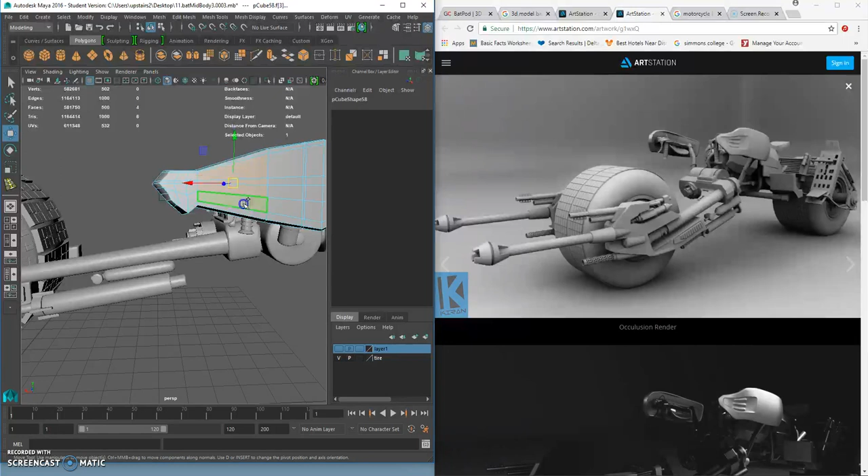Okay, in the last video I didn't have any narration, but I just made the handle. We could add a little bit of detail like this thing. Let's go ahead and do that. Actually, I don't think that's totally necessary. We'll do it, but it'll probably look fine even without it, I think.

So that's just kind of getting our area we need. Oops, can't bring this in too much. Only about to there. Alright.

And then what we'll do is we'll just go to edge, face rather. We'll grab, let's see here, I'm going to grab these three and see what it looks like.

Alright, I'm just going to fix that up a little bit.

Alright, let's see what it looks like. Kind of cool, honestly, I think you could give or take that. It doesn't really affect the geometry a whole lot.

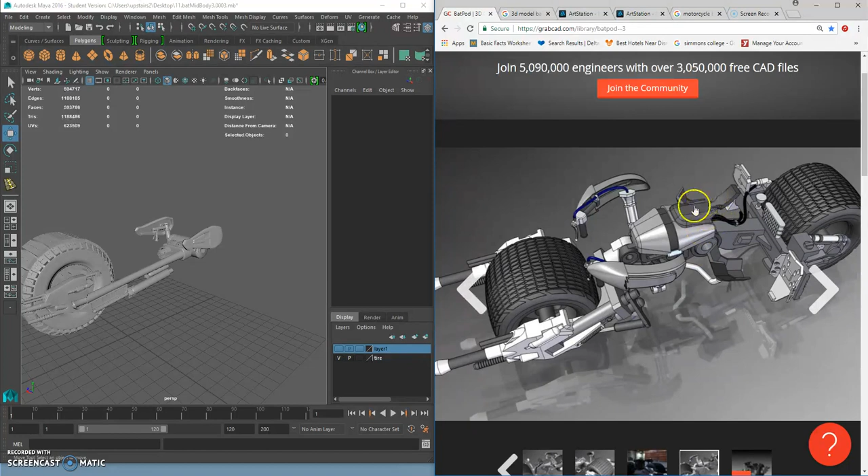Now we have to make the mid body. So it's this thing, it's kind of like that shape. The rider's going to be sitting here, their butt's going to be here, and their legs are going to be here. And they're going to be kind of gripping this thing. So they're going to be sitting like that.

So let's go ahead and create that thing, create that general shape. And let's go ahead and kick the subdivisions up to 3 each way. Or 2, let's do 3. I think 3 will be good.

Alright, so that's pretty good. Put it right in the middle here.

You could do this, let's make it a little bit wider. Alright, good. Alright, so let's go ahead and start shaping this thing up. Kind of come in here, taper in the back.

Alright, control delete, I'm going to get rid of that, I don't want that edge there. Okay, I'm going to grab these edges here. Let's bring those back, bring those forward.

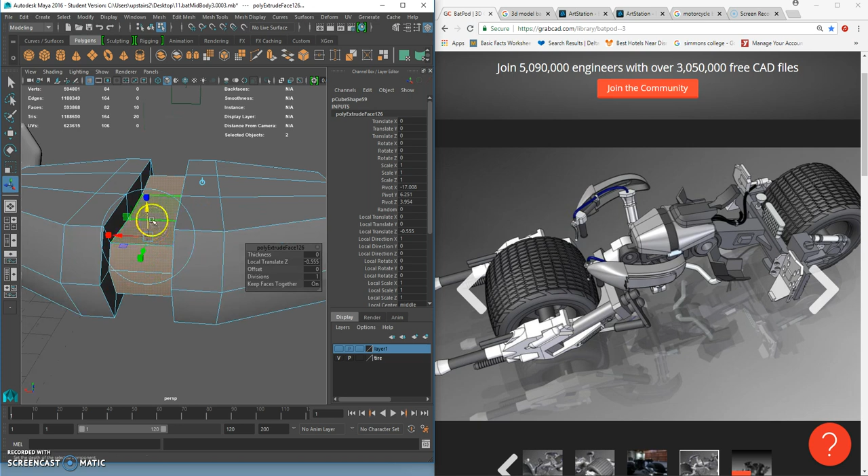Alright, I like the way that looks. And let's go ahead and hold that edge, hold that edge, let's go ahead and hold some edges now. Our usual process, set 3, and see what that looks like.

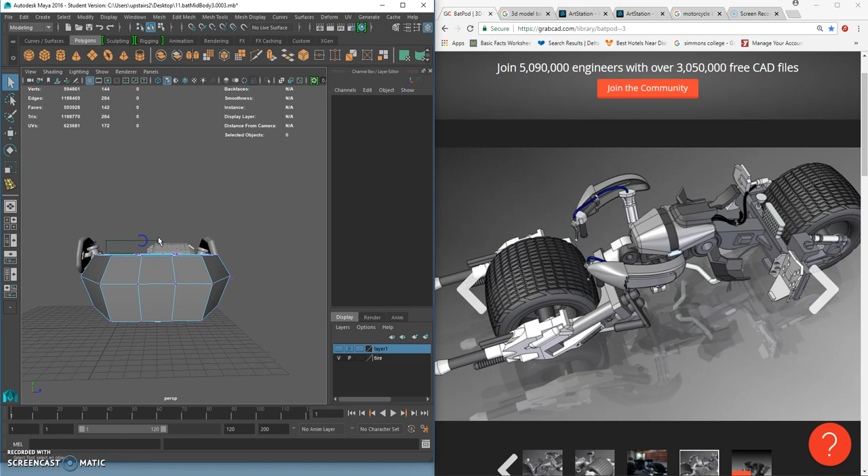Okay, it's not round enough. So what we're going to do is we're going to go to front vertex. And let's see, can we get a good view here?

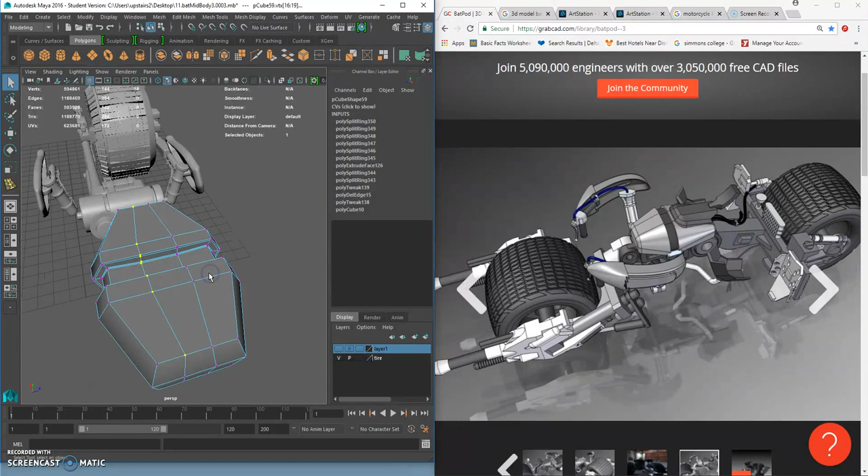Not really. Okay, so we're just going to have to select these, and we're going to deselect these. Alright, we don't want to get any of these. Just click, click, click. Alright.

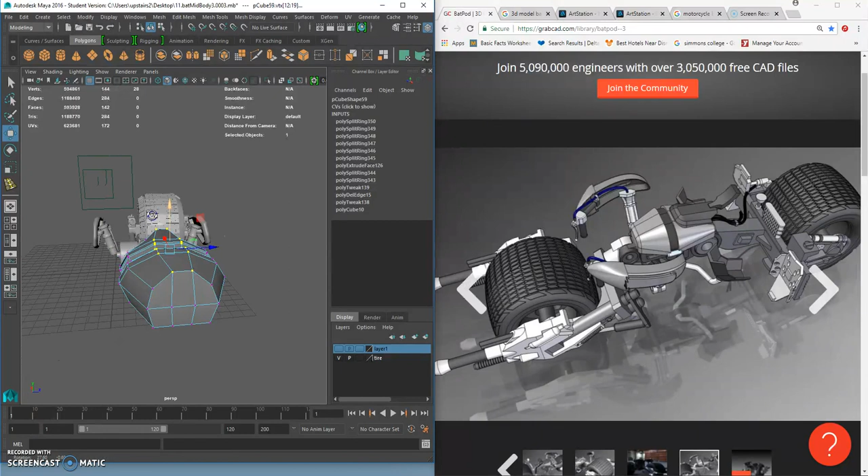Kind of an annoying selection to make. Alright, let's hit 3. That's good. Okay, now what I want to do is I'm going to widen these out a little.

I'm going to insert some edge loops here. And what this is going to do is actually harden that edge up. So watch what I'm talking about here. So when I do this, watch what it'll do. It'll put in these lines.

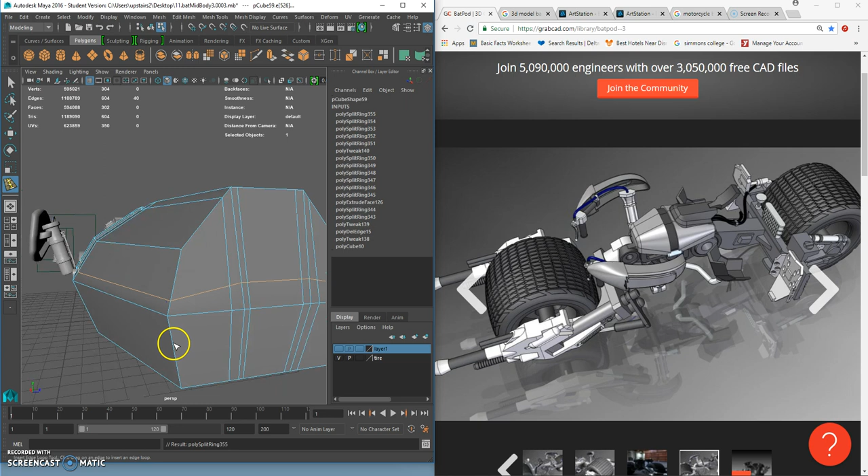And that looks really cool. And we're going to do it on the side too. You don't have to do this, it's just like a style thing, I just like the way the style looks. Yeah, it looks really cool, that's really nice. Okay, let's go ahead and put our blend on.

Alright, so now we'll go ahead and make the seat.

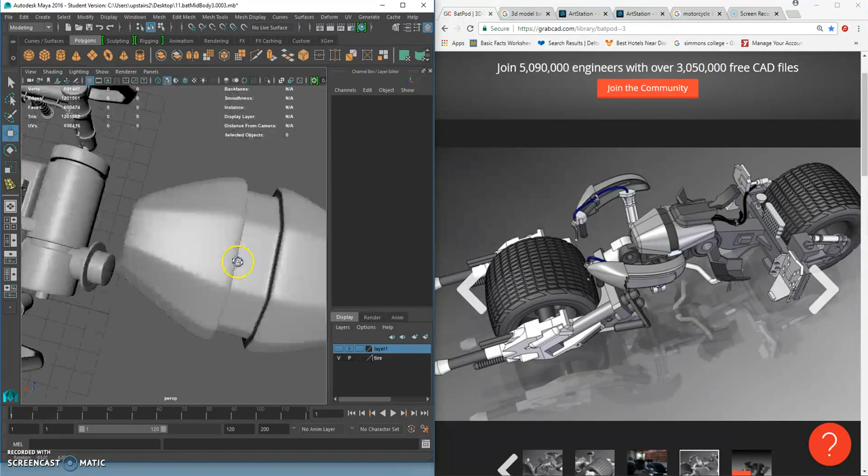We need to attach this somehow, so it's going to look like it's attached. Let's go to face here, grab this face, hit Control E, W, and attach it.

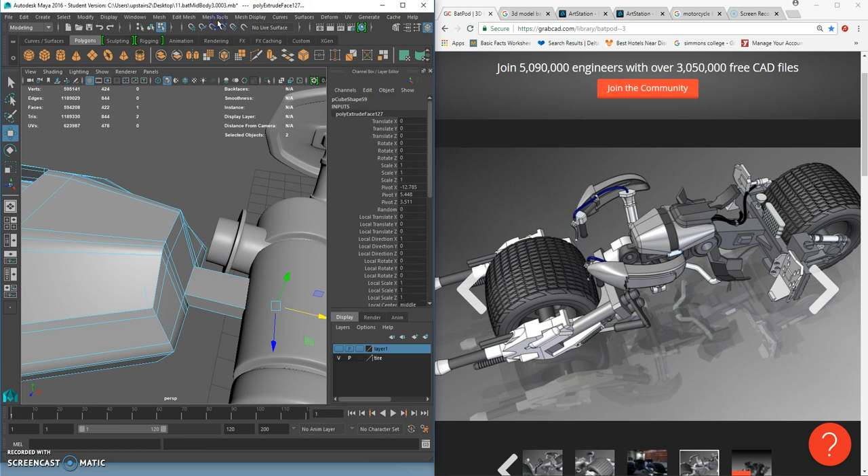I can't see that, so I'm just guessing where it ends. It kind of snaps at the end. All right, that looks better.

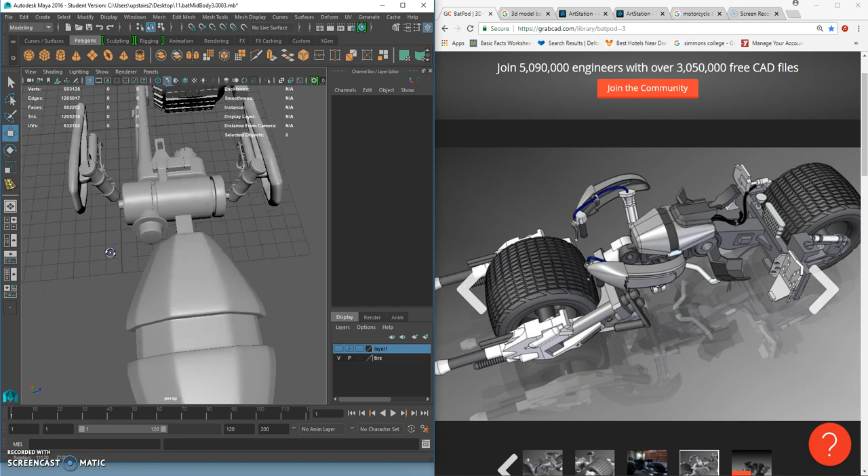Right about there, so now it looks like it's attached. It's not attached that securely, so maybe what you want to do is get another one of these.

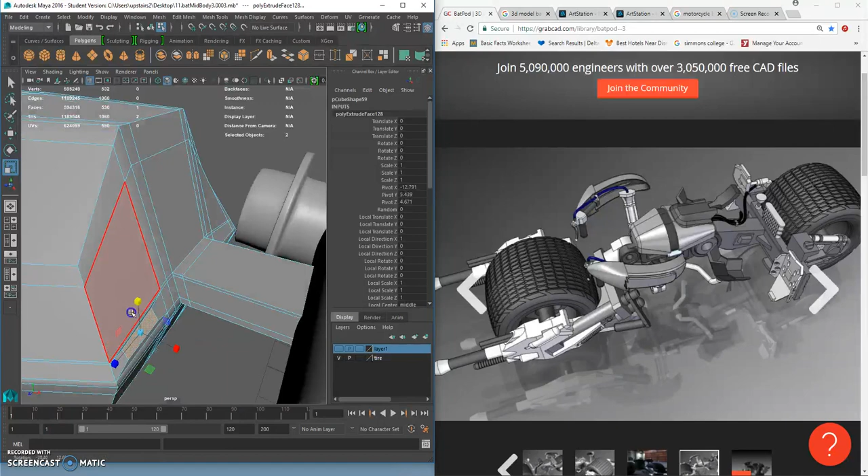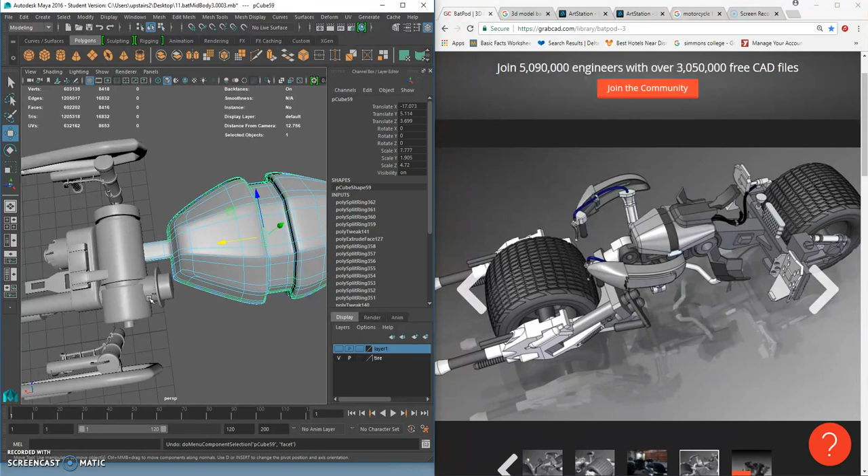Control E, and let's scale it in a little, then Control E again, W. I don't know if this will mess up the aesthetic. It's not bad, it's kind of cool. Yeah, we'll keep that, I kind of like it. All right, let's keep that.

Okay, so let's go ahead and make a seat now. The seat is obviously going to be right on top of here, and that's a pretty standard design, except this thing's kind of cool, so we'll mess around with that. And it kind of gets bigger at the bottom.

So what we'll do is scale this down, bring it up. Face, Control E, and bring it down. And we're going to scale it out. Control E, W, and bring it down. So that'll be kind of how the bottom's going to work.

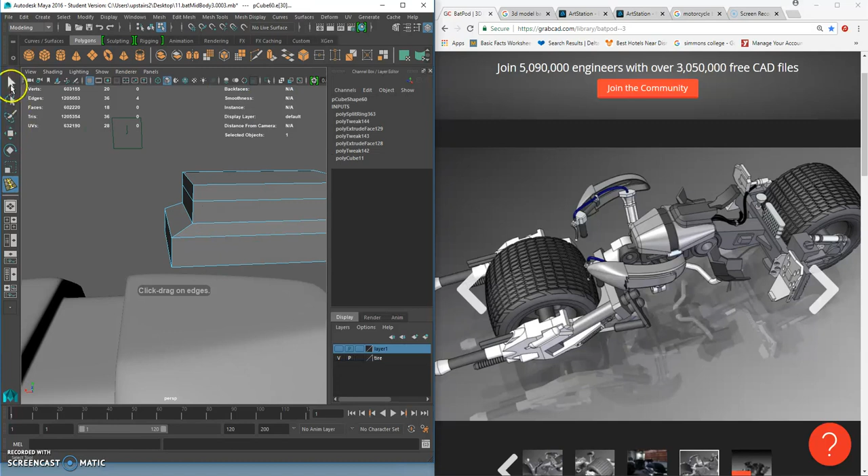And what we could do is do something like this. We're going to kick that in, so that'll be that. I still think this is a little too big, so let's bring that down. Okay, so far so good.

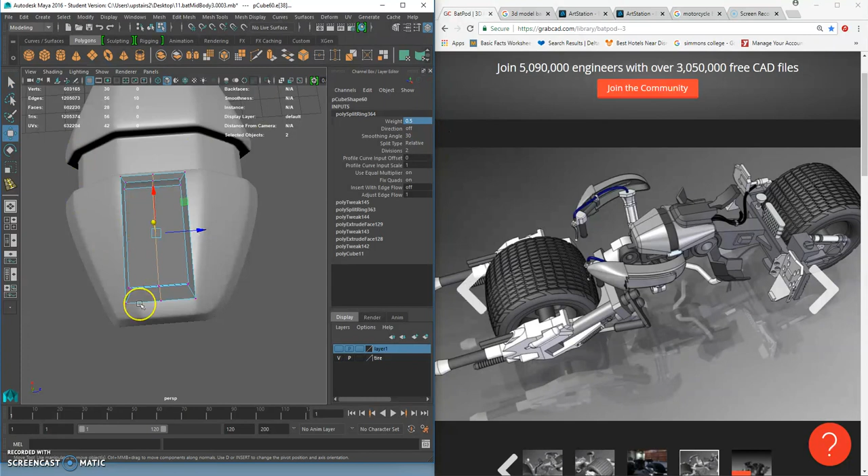Let's go ahead and insert an edge loop here, and what we're going to do with this loop, we want this to be at 0.5 just so we know it's in the middle. Not a big deal if it's not really, but it'll just look a little better if it is.

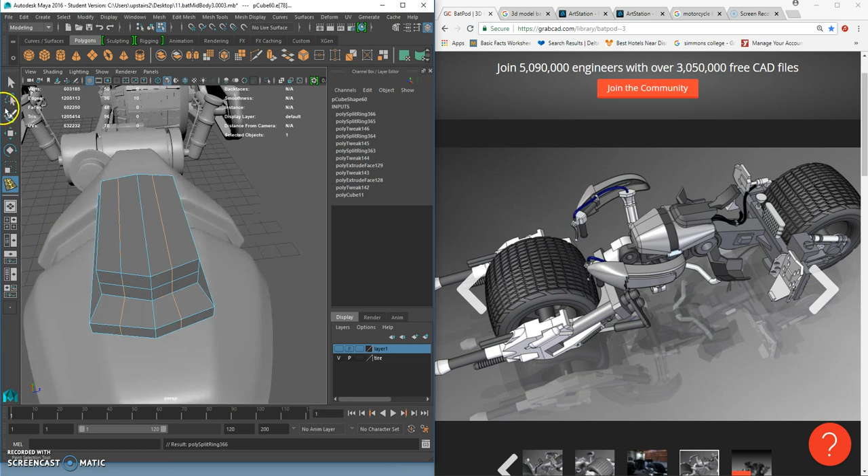We'll add more edges later. Let's go ahead and cut out a little, we'll cut out a little insert here. Okay, here and here, and there. Let's go ahead and straighten that out. Okay, the insert's going to be right back here.

I'm just going to go ahead and delete that. Okay, and go to Edge, double click this edge, hit Control E and W. And scale, we're going to scale it. Then Control E and W and bring it down, just so we have a little cutout here.

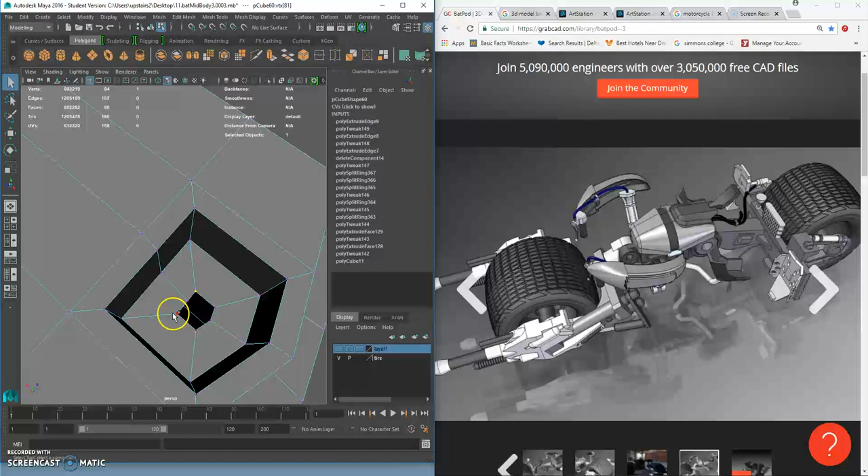And let's go ahead and Control E and scale this in. Go to Vertex, highlight these verts, and go to Edit Mesh, Merge to Center. Okay, see, that's not going to really matter because you're not going to see that.

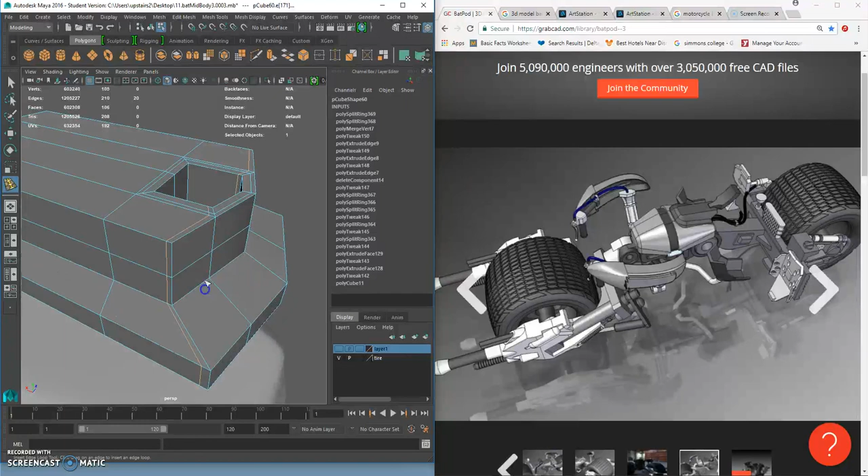Okay, this looks good. Let's go ahead and insert some edge loops now. All right, let's hold some corners.

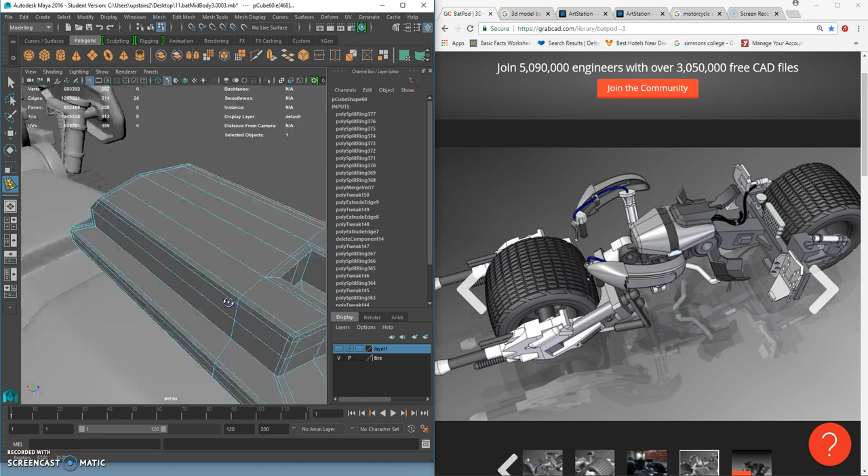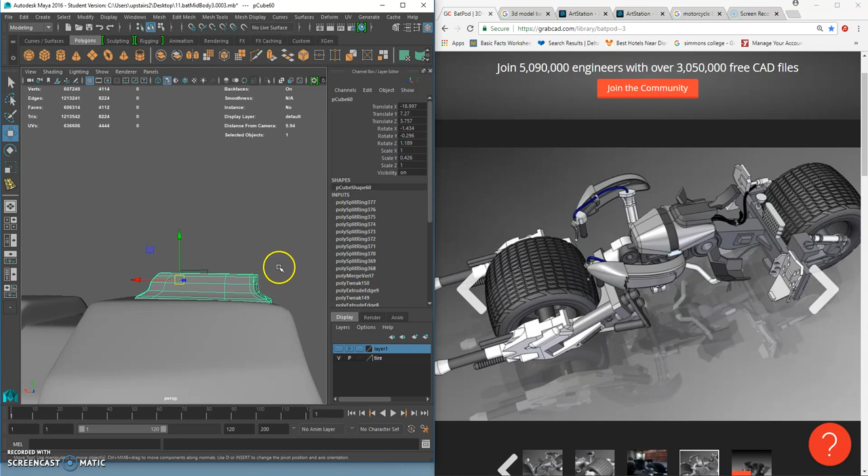Let's see. Not really liking this, I don't like this piece. So what I'm going to do is go ahead and delete that. We're going to try it again.

We're going to try it with a different piece of geometry this time. Okay, we're going to go with a different design, I didn't like the other design. Let's go with this one. This will be, I don't know, a little bit easier to do too, I think.

Okay, so what we'll do is this. Sometimes when you have a model, it might not always look good, so you have to redo it. That happens. All right.

And it kind of curves up gradually, so we'll do this. Let's do this. And we'll do this.

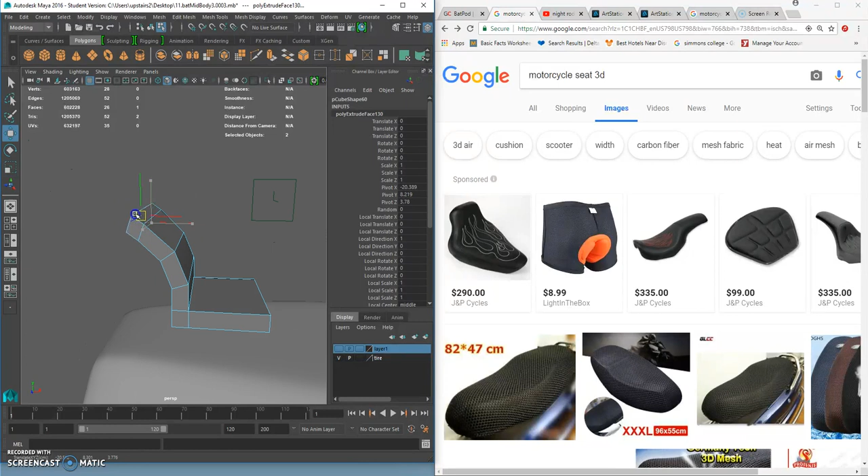Right about there, okay, that's going to be pretty decent. And let's bring it up a little. We'll bring it in, and that'll basically do it.

So let's go to Insert Edge Loop. Sometimes simpler is better, sometimes a nice clean design without any kind of extra detail will look pretty good. So let's see what this looks like. Yeah, that looks perfect, that's good.

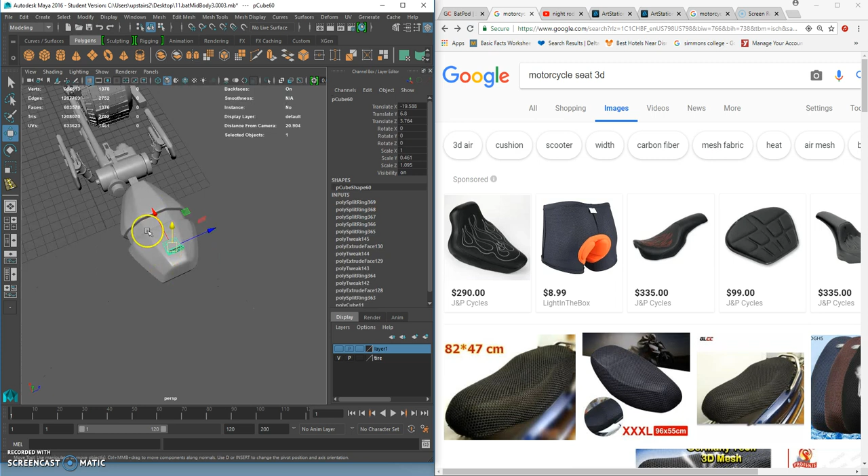It looks kind of standard for a Batman seat, that's okay. Let's make it a little bit wider. Let's make it a little narrower.

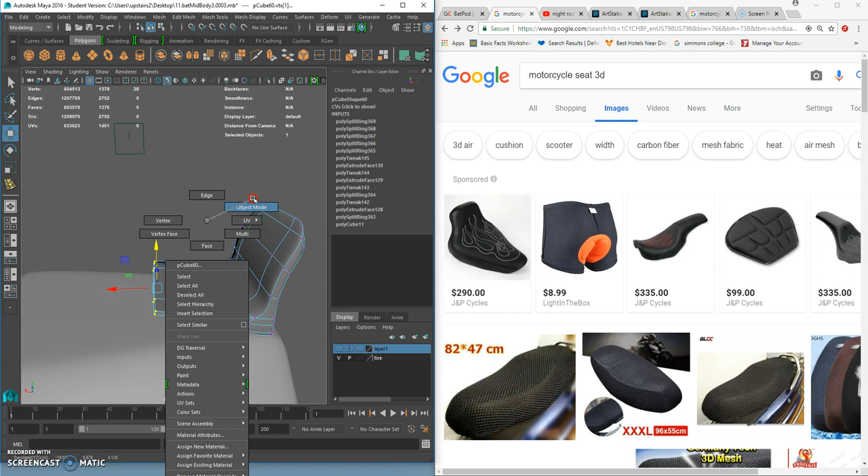We'll put it right at the back, we'll kind of put it right into the seat here. All right. Oops. All right, that'll kind of work.

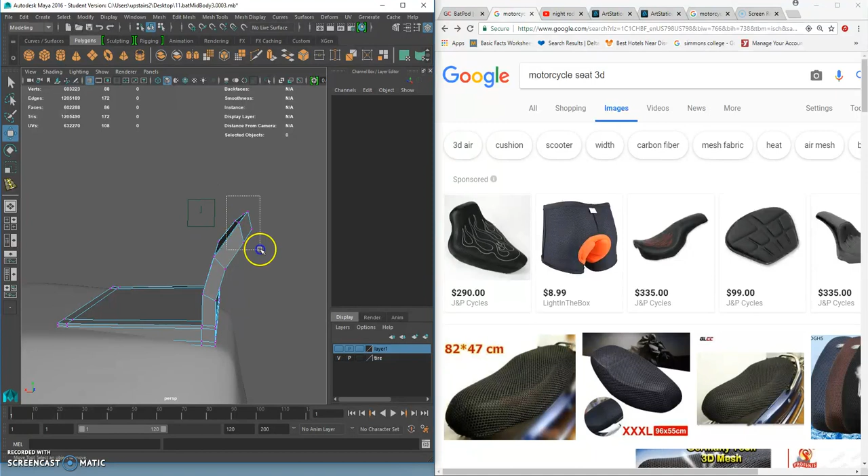And maybe what I could do is go to these verts, scale them out a little. And let's go to these and bring them in a little.